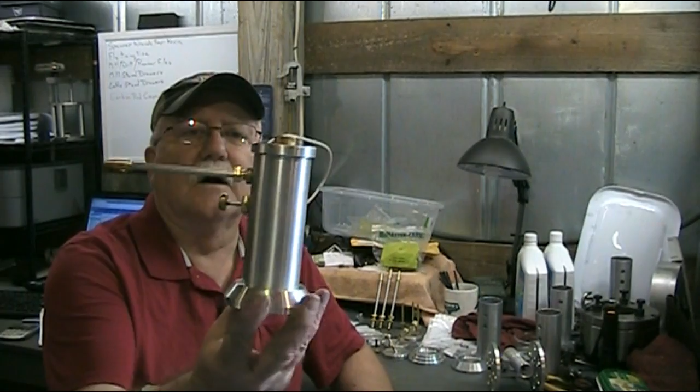Well, this year I decided to do something for my 3 brother-in-laws. I've got 1 sister and her husband, and my wife has 2 sisters and their husbands, so that's 3 brother-in-laws, plus making one for myself as well. What it is, is a clone, I guess you'd call it, of the Eagle 66 pump oil can. I'm going to be making 4 of these in the coming video. I think this will probably be a 2-part video.

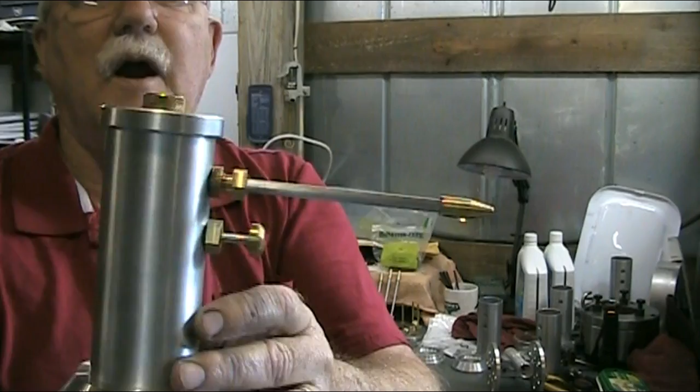I'm making it out of aluminum: base, tube, the pump housing inside, the cap, and the spout. All the accent pieces are made from brass - the tip on the spout, the trigger, basically all the accent pieces. And just like the cannons, they're functional, they pump, and again we'll be making 4 of these.

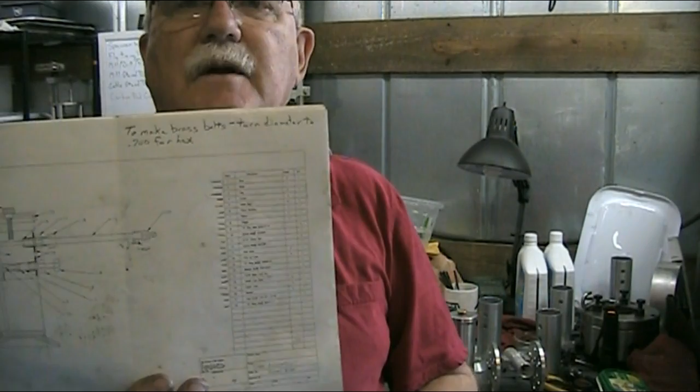In the video itself, these plans are available online at thehobbymachinist.com forum, but I'm going to be showing you the plans in the drawings as well. I'm going to put the video together in the order of the line items. There are 22 items in here, some of them are purchased items such as O-rings and springs.

But the rest of them are machined items, and I'm going to put the video together in the order of these items. Just before each segment of the video, I will put about a 10-second snip of the page and the item itself that I'm working on.

That's not necessarily the order, well, it's not at all the order that I made the pieces in. You'll also see in the video my collet chuck that I made extensive use of in this series. It's a 5C collet chuck for the lathe, and I haven't had an opportunity to make a back plate for it, so you'll see it mounted actually in my 4-jaw chuck.

I'll mount the collet chuck in the 4-jaw chuck, indicated in, and it worked fine. As a matter of fact it works so good, I'm not in a hurry right now to make the back plate for it. But enjoy the video, like I say it'll be 2 parts. At the end, we'll come back and put the pieces together and assemble it for a finished oil can.

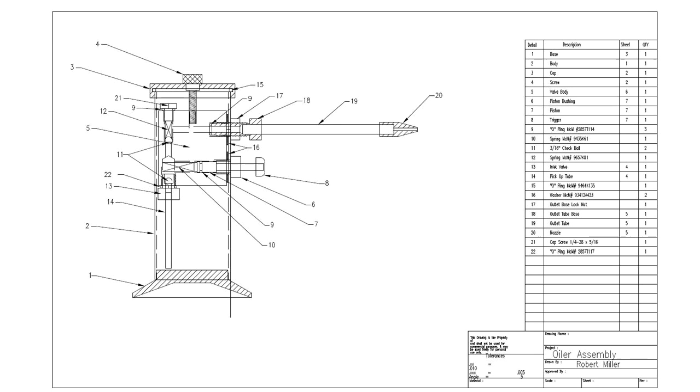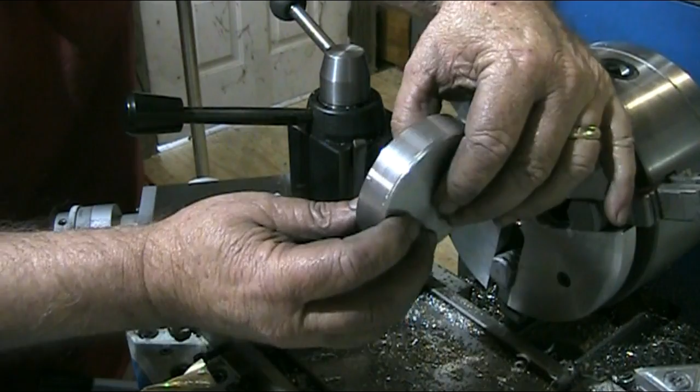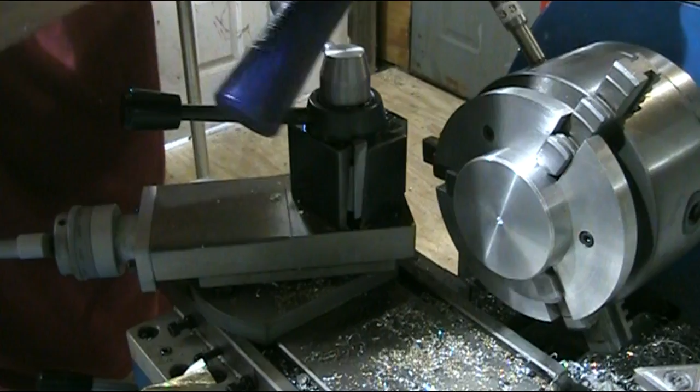Line item number 1 on our drawing is the base for the oil can. Drawings call for a piece of stock 0.735 thick by 3.1 inches in diameter. Going to load that in the collet, in the chuck.

To bore out for the tube itself, I'm going to start with a 1/2 inch end mill, then a 9/16 end mill, just to give a good flat bottom to start with. I've got the tailstock DRO zeroed out now.

Alright, we're going to start with our boring bar. I'm going to get a close zero from the DRO, and I'm going to bore this out to the diameter of the tube itself, which is approximately 2 inches. It's sold as 2-inch tube, but it will vary a little bit. I'm going to bore this out, and when I start getting close to it, I'll bring you back.

Alright, I'm getting very close to the diameter of our body now, and I'm having to remind myself that each time I make a turn, I'm taking off the diameter. So I'm going to take just a couple thousandths at a time on the dial and measure between each one.

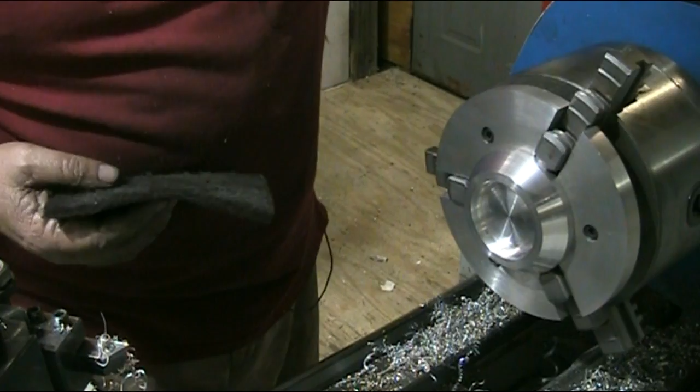Okay, I'm pretty well happy with that. So I'm going to turn it around now and buff that up just a little bit. While we're running, I like to put the lathe in reverse when I'm doing this, just so the jaws are pulling away from me instead of pushing into my hand.

I have our base flipped around now in the chuck, and just like on the top side of the base, I use the end mill to get us a flat bottom starting hole, and we're going to make a hole in here. This is a quarter inch deep, and remember from the top side it was a quarter inch in, so that leaves about a quarter in the middle. But we're going to make this diameter approximately 1 inch. Then we'll relieve it from the bottom of that hole to leave just a small border on the outside here to come in contact with the surface it sets on.

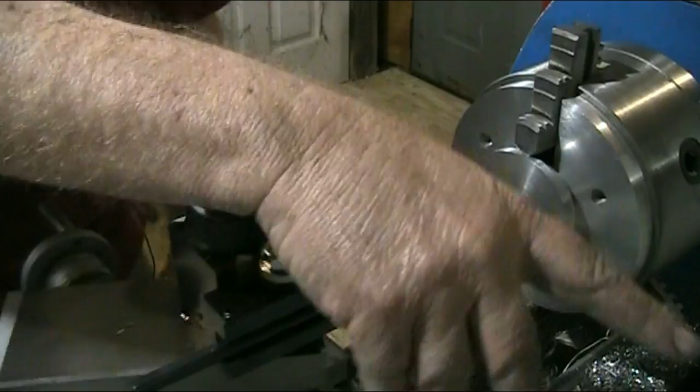All right, I'm going to get the compound set up now. Okay, I have the compound set up, and we're going to bevel from the bottom of this hole to approximately 1/8 from the outside edge here.

I'll move the carriage out of the way, then I'll get that buffed up, and this part should be finished. And there's our base.

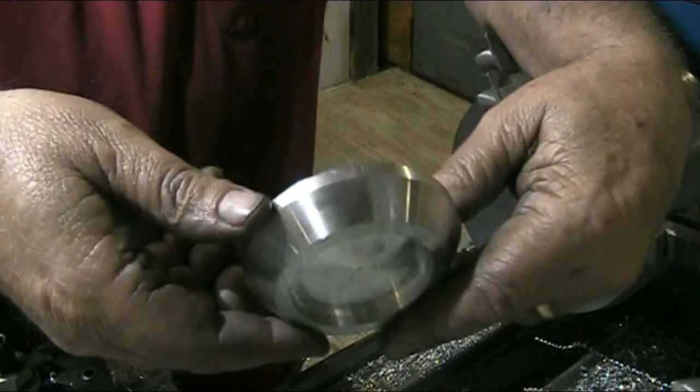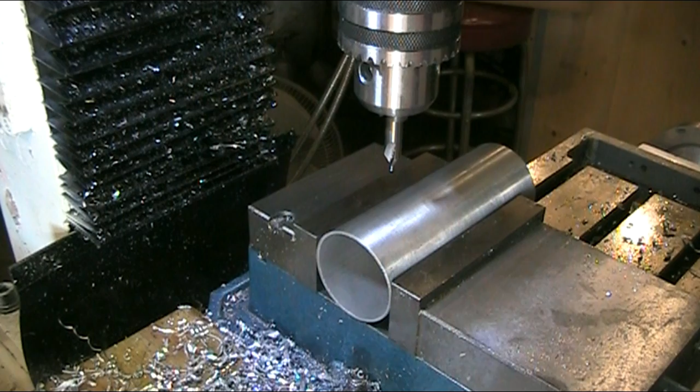Line item number 2 is the body of the oil can. This is a piece of 2-inch stock. I've lightly got it clamped in the vise to keep from crushing the sides. I've moved in 1 inch, and I will drill these for 3/8.

Since I'm going to have to be moving the column up and down, I'm going to move the table first to each location. That's 1 inch from the first hole. I'm going to be drilling this very slowly, and I'm going to drill it a 64th less than 3/8, then go back and ream it for 3/8 just to have a better fit so I don't have a lot of ragged edges.

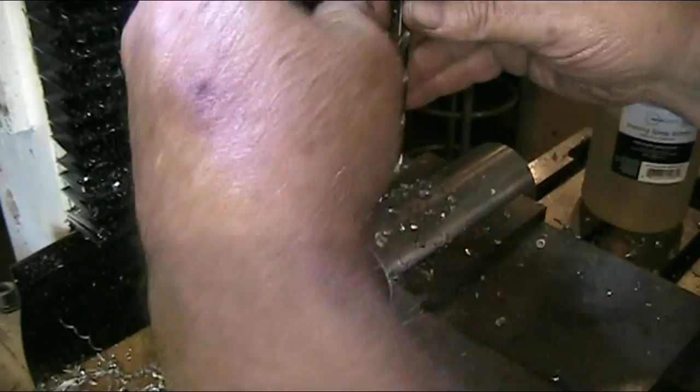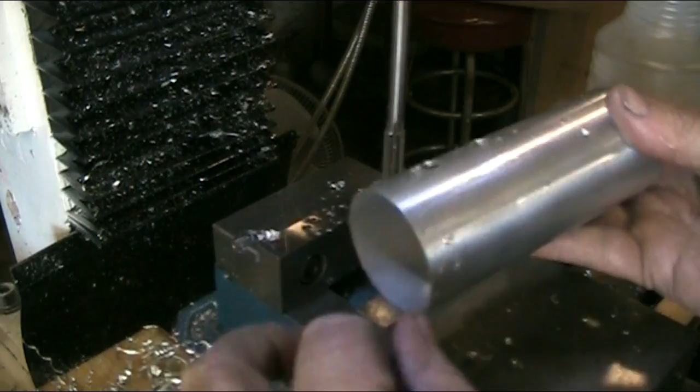One other quick comment about the body. When I sawed these off, my saw didn't cut them perfectly straight. I doubt there are very many saws that will cut them perfectly straight. But obviously I couldn't put this in the lathe chuck to try to face it off, because simply clamping this in the jaws of the lathe would likely crush those sides in. So what I did was take my square and place it on there, find any high spots, mark it with a pencil, then go to the vertical belt sander and just keep working those sides down. I did that on both ends until I got the end square.

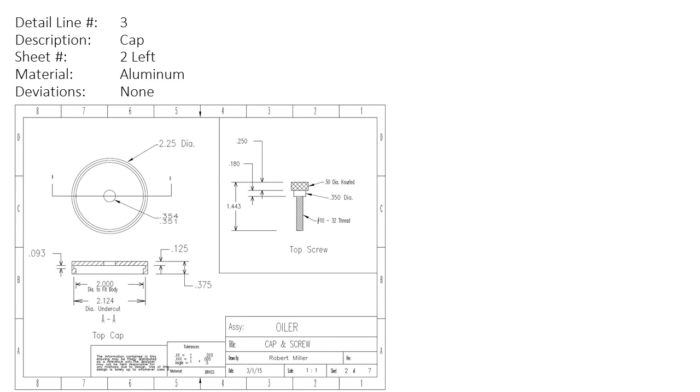Line item number 3 is the cap. I'm starting with a piece of 2 1/4 inch diameter by 3/8 of an inch thick round stock. We're going to drill a 23/64 hole all the way through.

Now we're going to bore that out to just a little over 2 inches, so it's an easy fit over our body. So I'll get the boring bar set up, and I'll bring you back when we get close to having this bored out.

We'll be boring it a depth of, let's see, 150 thousandths—I misspoke, instead of 150 thousandths deep, that was 250 thousandths deep. So I'm going to keep boring this out until we're close to our 2 inch mark.

All right, we're close now. We've got a few more thousandths to go. We want, for the cap itself, a loose fit—not a sloppy fit, but a loose fit. And that's just fine right there.

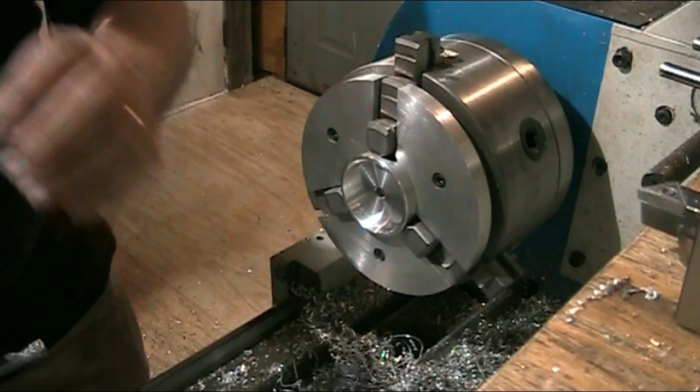It will have a screw through the top of it to hold it in place, and it will have an O-ring to seal it.

Now to cut the internal O-ring groove. I'm not a whole lot on grinding tools, but I did grind this one, and we'll see how that works out. The plans call for 124 thousandths undercut in here for the O-ring. I'm going to start with about 100 and then fit to the O-ring from there.

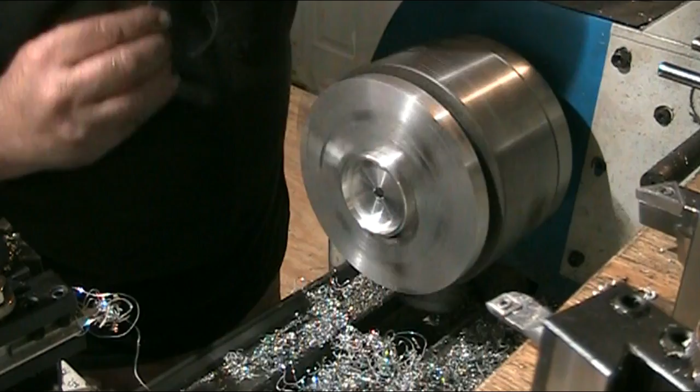I've got the DRO set, and we need just a little more in the width. All we want is for this O-ring to lay in there, and it does—it's a good fit.

Grab the deburring tool and polish up the edge, and there's our cap.

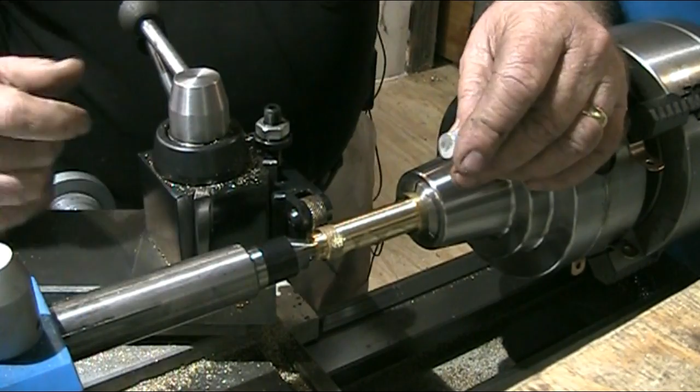The next piece I'm going to work on is called the top screw, line item number 4 in the drawing. I made one to begin with from aluminum as per the plans, which called for a 1/2 inch round. After I got it done, I just don't like that smaller size, plus I decided I would go with brass instead of aluminum.

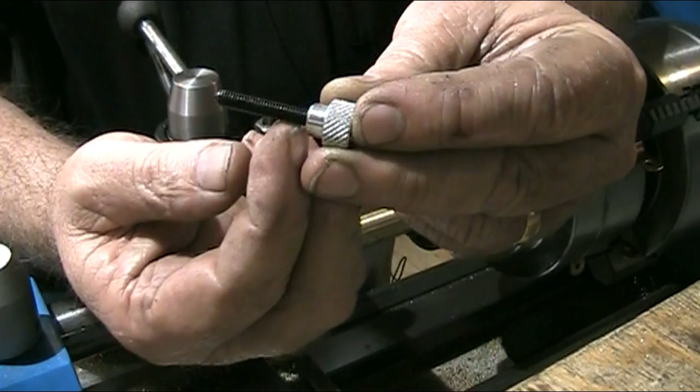It has a shoulder on it and a 10-32 socket set screw, or grub screw as our European friends like to call it. I'm going to make this out of brass, 3/4 inch diameter, and knurl it with my little knurling tool that came with the quick change tool post set. I've never done very much knurling, and haven't done any brass, so we're going to see how this works out.

Well, that's not looking too bad at all. As a matter of fact, it's looking pretty good. I'm going to make a couple more passes on that, and then I'll bring you back.

The piece is knurled now, so we'll start working on turning our shoulder on the end, drilling and tapping for the 10-32, and then parting it off.

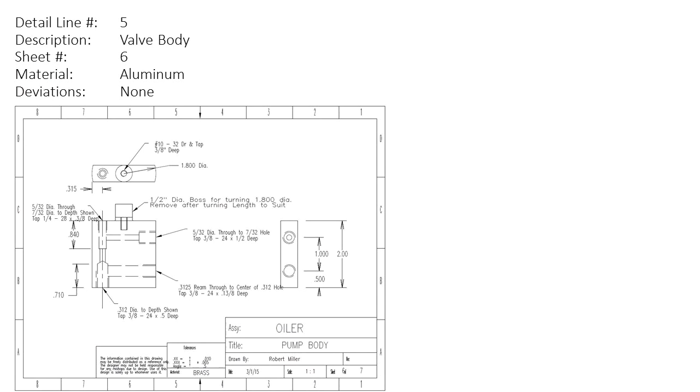Line item number 5 is the valve body. We're making this out of 2-inch wide by 1/2 inch thick aluminum flat bar. We're going to turn this down - I've got it indicated in the four-jaw, and we're going to turn it to the diameter matching the size tubing I'm using for the body.

The plans, if you're following along, call for 2-inch brass tubing with a 50 thousandths wall thickness. That's 2 inches minus 50 thousandths on each side, leaving 1.9. It calls for this body to be 1.8, so that's a difference of 100 thousandths between the valve body and the tubing. My tubing is 2 inches but has 63 thousandths per side, leaving 1.874. Staying with that constant 100 thousandths difference means I need to shoot for a diameter of 1.774 for this.

Now, making this interrupted cut - there are 4 interruptions to begin with, the 4 corners, then 2 more - it throws chips up in the air, really all over everything. So using something I saw on Phil's projects the other day, and I asked him about it and he explained it to me, I have a left-handed turning tool in the holder right here. Let me get it out where you can see it.

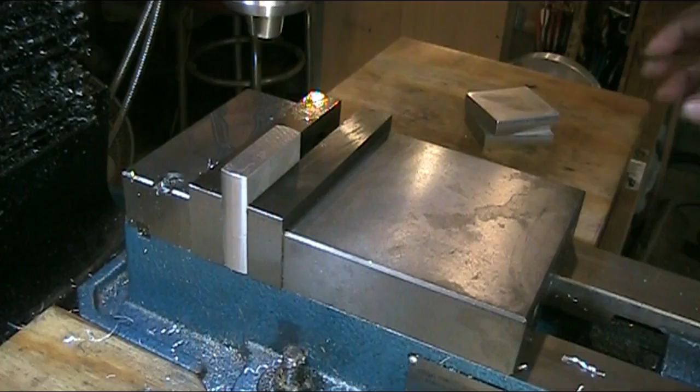All the valve bodies have been turned on the lathe now, and we've got them over here at the mill. I've got the center located. We're going to drill and tap, in this first step, a 10-32, 3/8 of an inch deep in the top of each piece. This needs to be 3/8 of an inch deep, so I'll zero out my Z-axis.

Now we'll use the bottom tap and snug it just a little bit. Alright, I'll continue that process on the remainder of the valves.

I have a work stop set up now, and I have .315 located from the edge here. We're going to drill a 5/32 through hole.

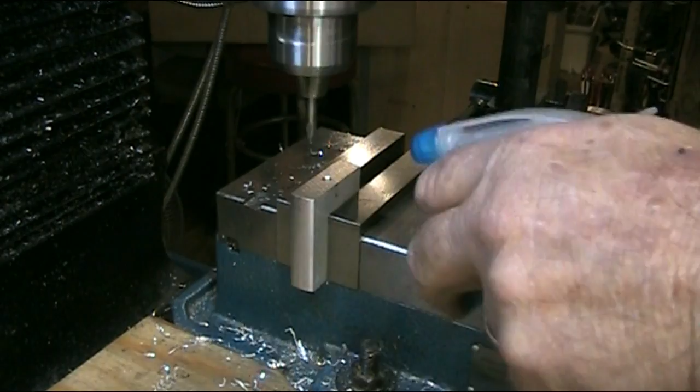This side, the plans also call for a tapped 1/4-28, 3/8 deep, and it calls for a 7/32 drill bit, but my Starrett chart shows a number 3 tap drill, so that's what we're going to use here.

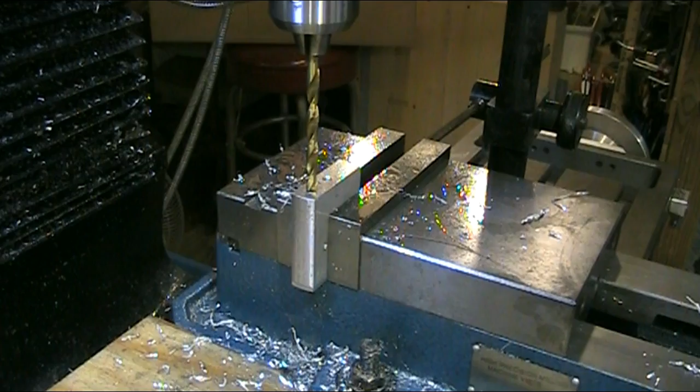We'll zero out the Z-axis, and we want to go down 0.375. Now I need a 1/4-28 tap.

I'm going to start out with the tapered tap just to get the thread started, and then we'll go with the bottom tap. Alright, I'm going to continue this process for the other 3, and then I'll bring you back when I get ready to work with the other side of this.

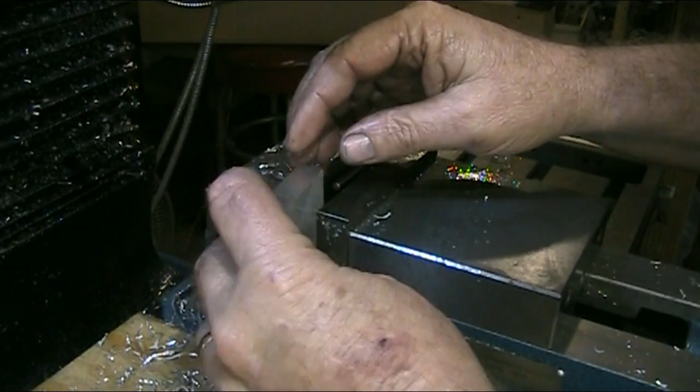Alright, the next step is to flip this over and do the other side. I've put away all the taps and drills I had for the first side so I don't get anything mixed up. And on this bottom side, we want to drill and tap the same through hole for a 3/8-24.

Plans call for a 5/16 drill bit, but a 21/64 is much closer to a 3/8-24. It's actually a letter Q bit, and I do not have a Q. This is within 4 thousandths of it, so that's what we're going to use.

It says zero out the Z, drill to a depth of .710. And just like before, we're going to start it out with a tapered tap just to get the thread started.

The plans say tap this to a depth of 0.5, so I'll be watching the DRO instead of watching for the tap slip. Got the DRO set to 0. Now I'll continue this process on the remainder of the pieces for all the oil cans.